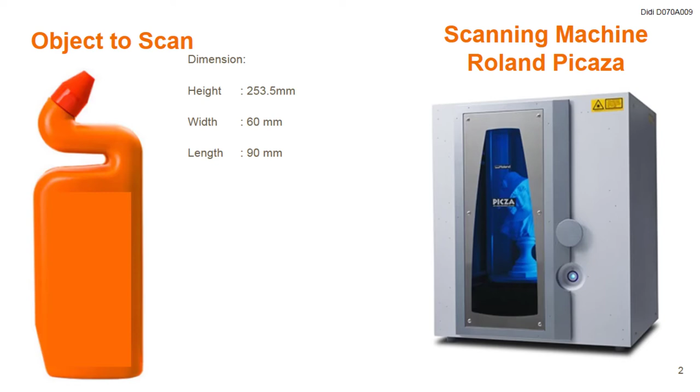The dimension of the part is like here in the picture. The scanning process I divided into two steps, the bottom part and then the upper part, because I want to get two kinds of scanning, rough and fine. So let's jump to the scanning process.

So first of all, we should put the part over here and then close the door, and we just turn it on. Okay, and at the software part, click the preview, I guess.

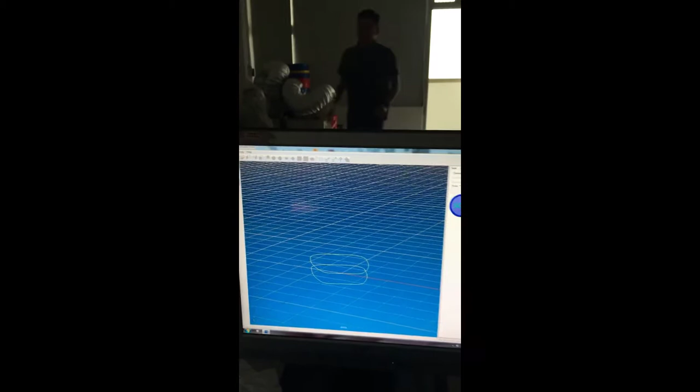You have an umbrella? No.

They are doing the preview. Inside there, there's a laser sensor, and right now it's doing the slice by slice previewing.

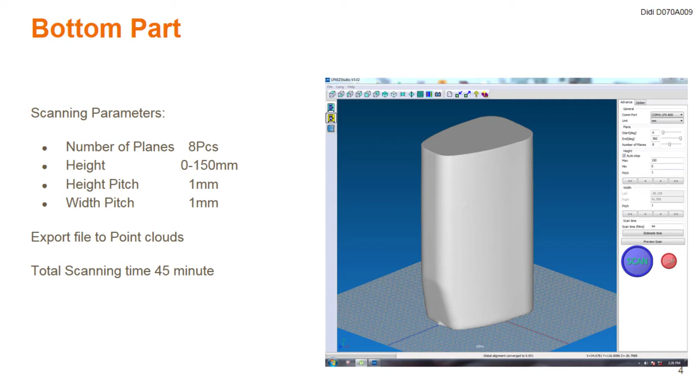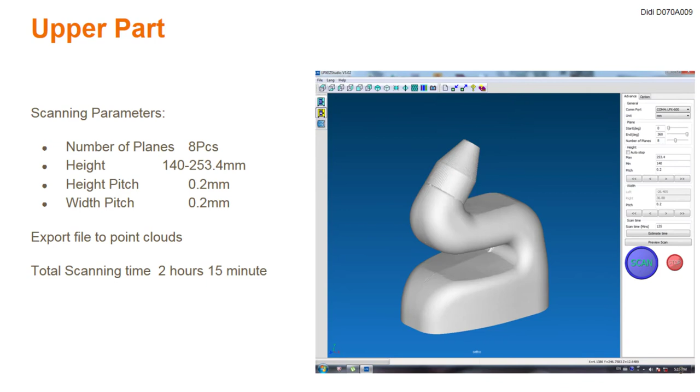Okay, let's see what's the result. So this is the result of the scan from the bottom part. The total scanning is about 45 minutes just for this bottom, and then this is for the upper part with a smaller pitch, and it took 2 hours and 15 minutes for the total scanning.

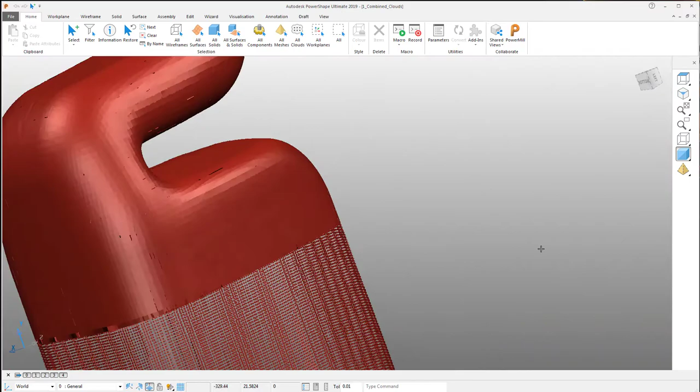So this is the point cloud which is imported into PowerShape. As you can see, there are two different resolutions of the scan data. The lower is the coarse resolution, and the upper is the fine. And then I just click both of the point clouds and combine.

Okay, after combining the point cloud data, I just click and create a mesh from it. I'm using the step over, I think maybe 0.5 is enough, and the fill hole diameter will be, I think, 5 millimeters. Okay, and then we just click OK, and PowerShape will generate the mesh from those point clouds.

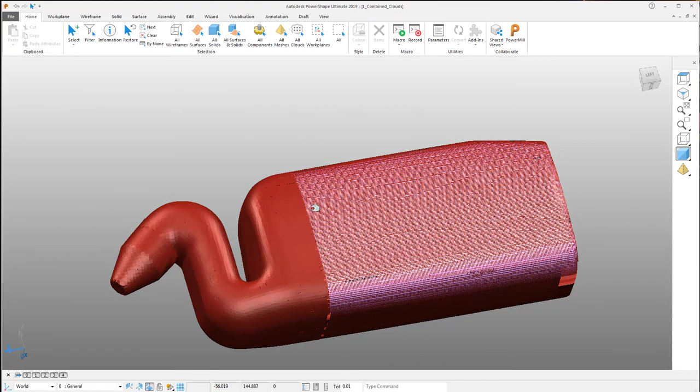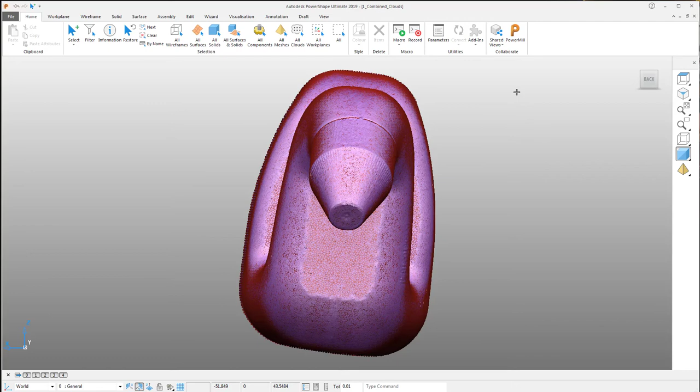Okay, it's done, and as we can see here, I will show you. That's the purple color. As you can see, there's the point cloud merged with the mesh data. I think it's quite a good result, but the orientation is not as we desired.

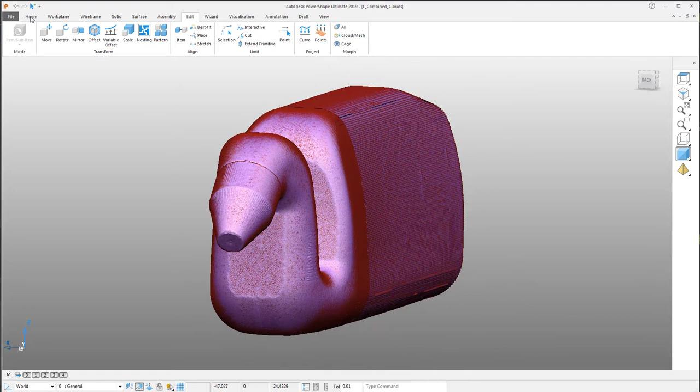So I will reorient using the rotate command, using maybe 6.5 degrees. Okay, just click OK. Yeah, I think it's aligned enough. It's good enough for the alignment. Okay, now I will select the point cloud and put it in the layers, so we can continue working, and then select the point cloud to the selection.

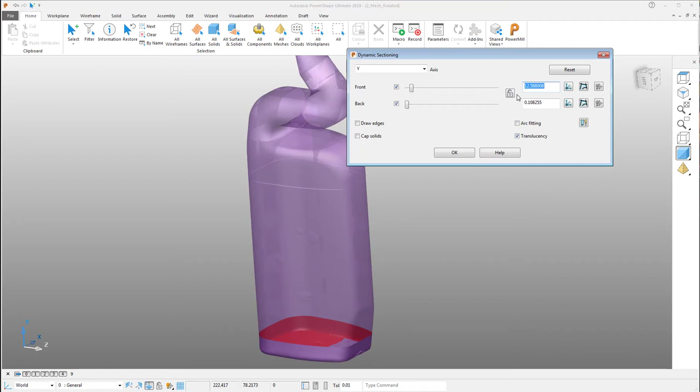Okay, this is the view of the mesh. And then we are going to start building the wireframe like a skeleton, basically using the dynamic sectioning. As you can see, if I slide the slider over there, I can see through using the sectioning, and at a particular section I just click create a wireframe. So basically PowerShape will create the wireframe around the axis, around the mesh.

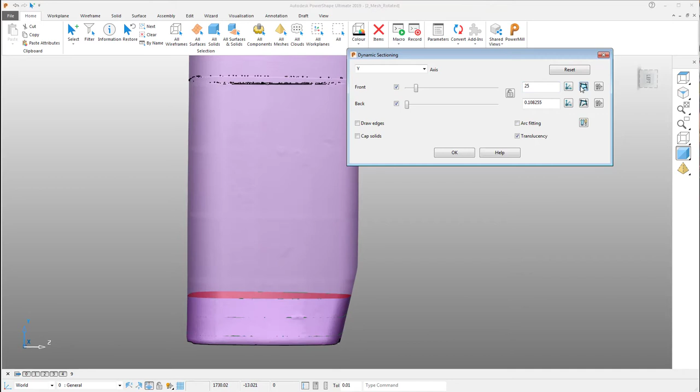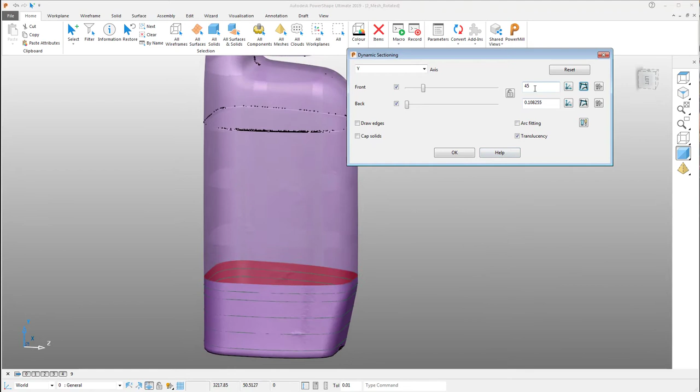Okay, so I just continue creating the wireframe over there. Because there's a slight taper angle, I need a few wireframes, and when it comes to the top, I assume it's not necessary to put wireframes in between, because the shape is similar, maybe like an extrusion. So I just create the last wireframe over there. So just jump into the last section of the wireframe.

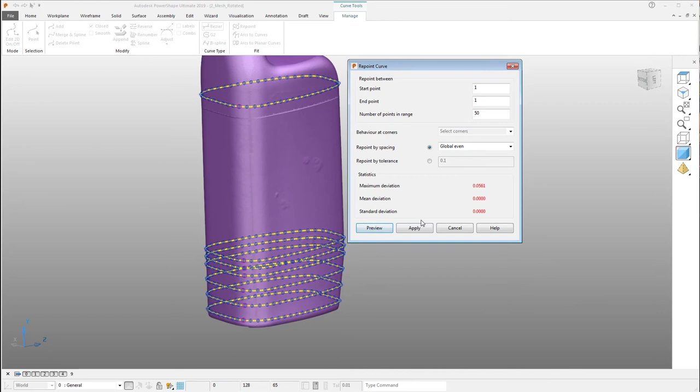Okay, so I select all the created wireframe here, all of it, and then I do the repoint to rearrange. Okay, so after I arrange, I just click all the wireframe and then use the smart surfacer, and I will choose the appropriate command. Okay, so that will be the body.

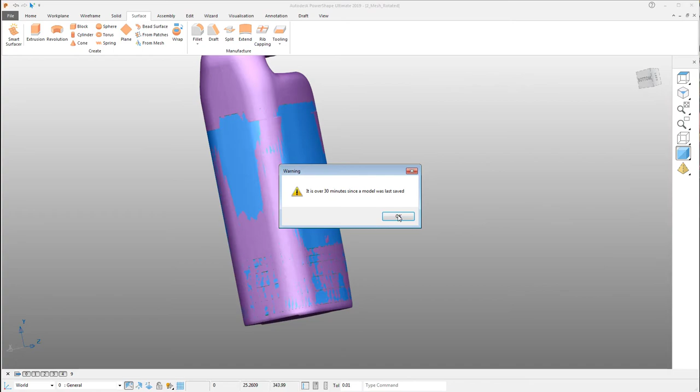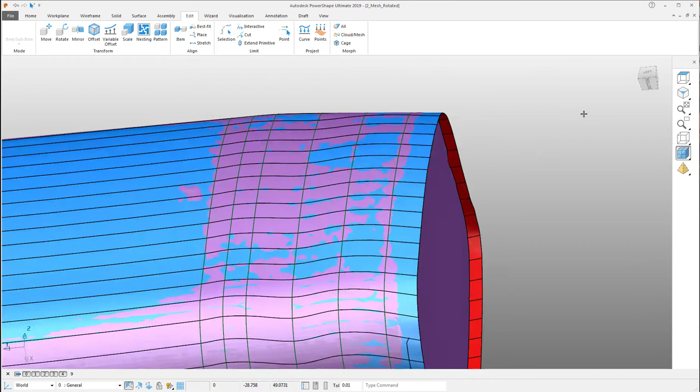Okay, that's the body. So for the bottom part, I need to create the extension of this surface using the point over there. So I just click and drag to the particular location, and then in that particular position I use manual segment to select the plane, and then we just select the plane over there, and then let's preview. Okay, it will create basically an approximation to the surface over there. So then I just hide

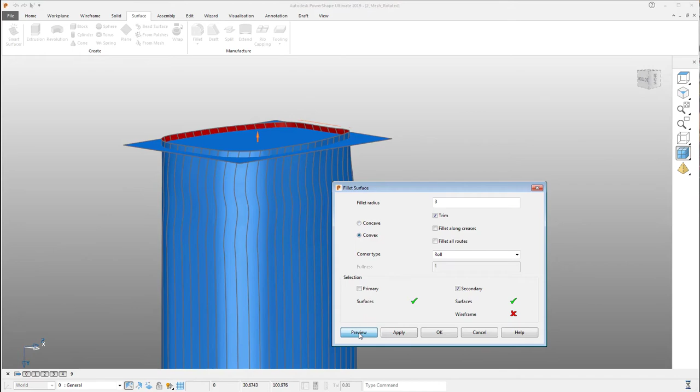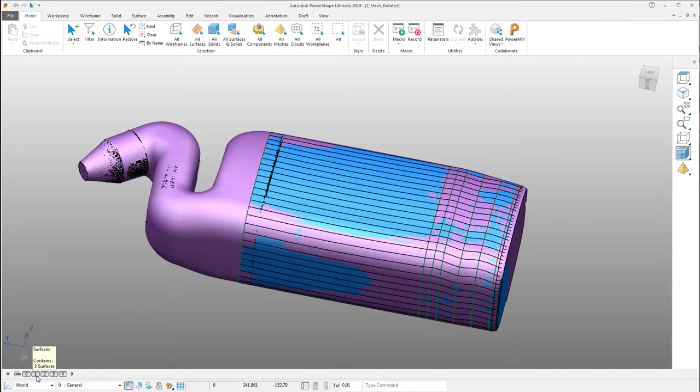the mesh, and then I will create the fillet in between those two surfaces, with a 3mm radius. Okay, yeah, I think that's a good sign. Okay, perfect. So let's continue to the rest. Maybe I will put the surface at layer 1, and then wireframe to layer 2.

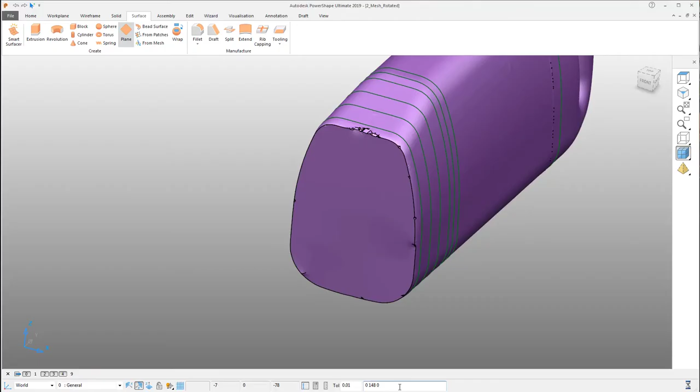Okay, so I need to create, I will divide the position over there. Okay, so I create a plane surface with 148 to create a plane over there. So that plane we're going to use later on to split the mesh, because the bottom surface is already created. So that particular location I need to use

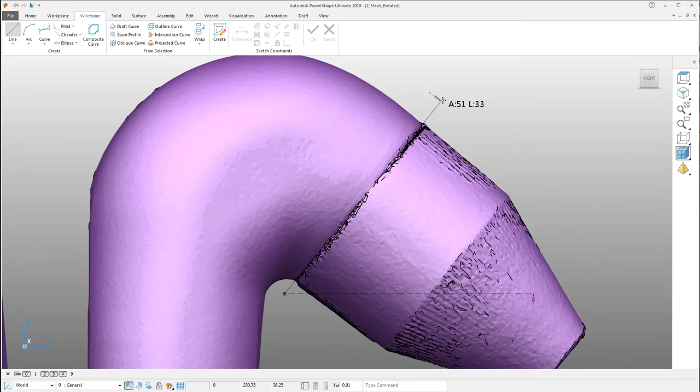as a cutting position. Okay, so I create a sketch here at around the neck position of the cap. I also want to use that line using a 51 degree angle, and then that particular position I will use to cut the mesh. Okay, so first of all I will create the surface extrusion on the line and then use the equal length.

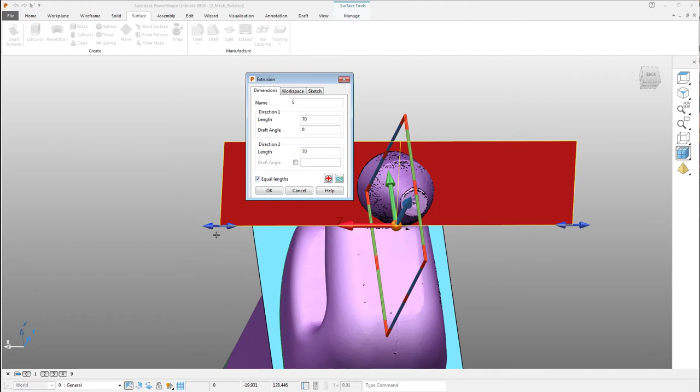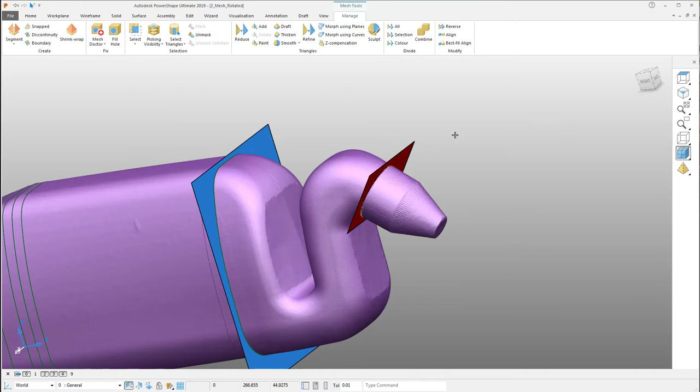So this surface is going to be like a knife to cut the mesh over there. Okay, it's already cut. So as you can see, I have divided the mesh over there. So from the particular mesh here, I create a new work plane. Okay, no, first of all I will create the boundary. As you can see, it will create a curve around that edge of the boundary.

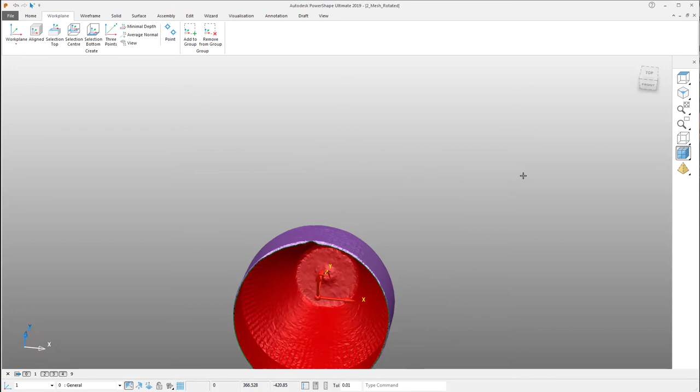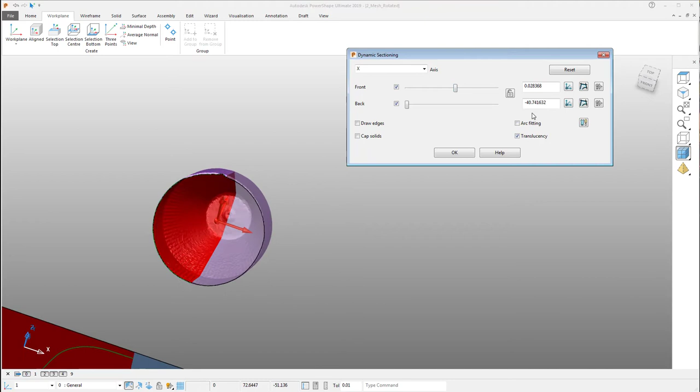And I also continue to create the work plane using the center selection here. It will automatically put the work plane in the center of this particular mesh, and then from that position I use the dynamic sectioning to capture the skeleton. As you can see here, if I slide, maybe I will use 0. And then from that position I capture the curve. Let me hide, yeah, over there.

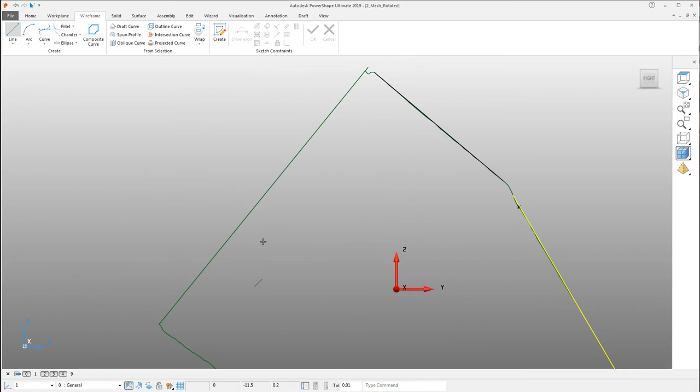So the principle is I will use this, we call it like a revolve sketch. So in order to have a smooth surface, I recreate the sketch over here using the line, as you can see. Okay, like that. And then I will continue to recreate this line. And then I will add a fillet over to this line over here.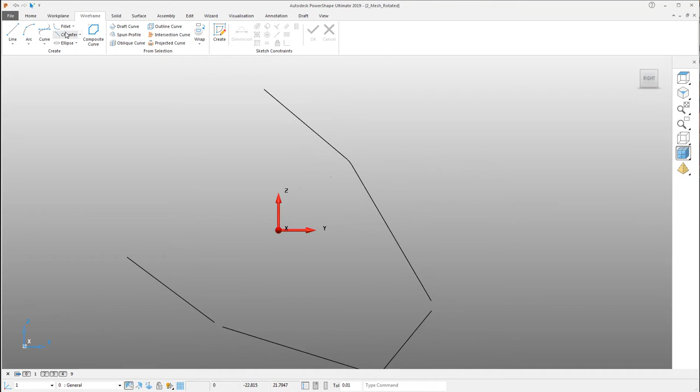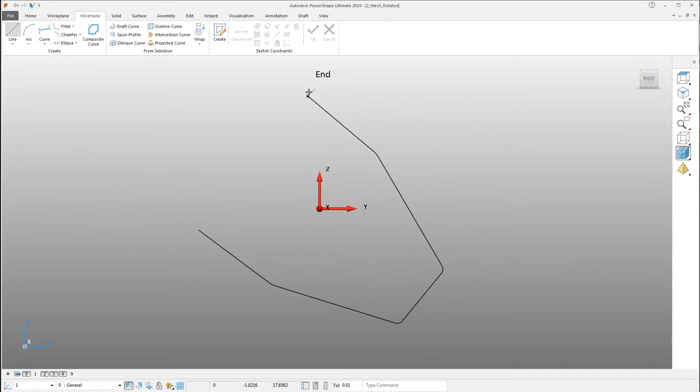I'll add a fillet there, and then I can drag the value of the fillet. Maybe 3 is enough. So I'll continue and also create a fillet over here, and then over there. Maybe it's too large, so we use a smaller value of the fillet. Okay. I will connect both ends and then use the midpoint.

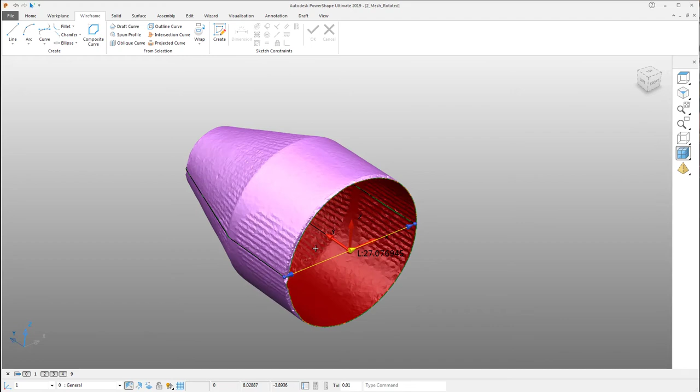And right now I'm going to reposition my work plane here, and then I will align the axis in order to match. To align, you just click and drag the arrow over there. Okay, I think it's perfectly aligned. So as you can see here, in PowerShape you can simply create a curve which will follow the particular edge of the surface, solid or line using the composite curve.

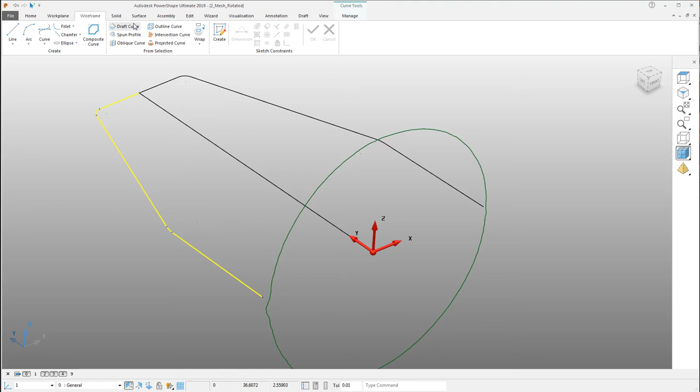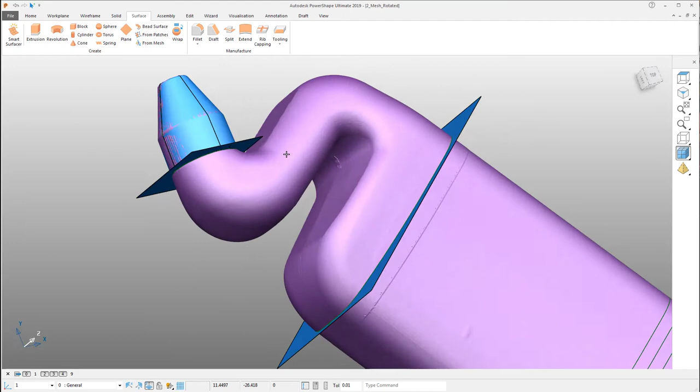So you just define the start and end, and then click, it will create the surface, and then I just revolve it like that. Okay, so it's created, the cap of the bottle. Now let's continue to what I call the duck neck, because it's like the neck of a duck.

So first of all, I will create the z-axis cutting over there. Okay, I will create the curve. And then I also need to add some radius over there.

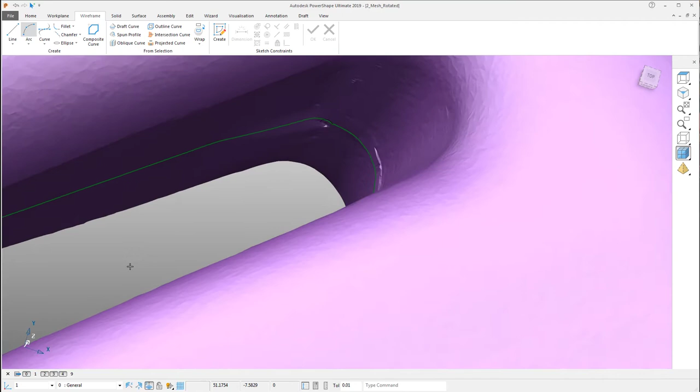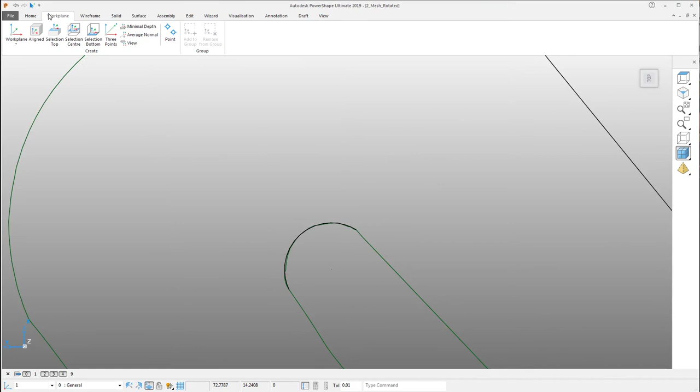Okay, let me adjust the position in order to get a better view. Let me hide the mesh first. Okay, over there, and then this one. Okay, then I'll put a work plane over there. So later on we're going to use that work plane as a useful reference.

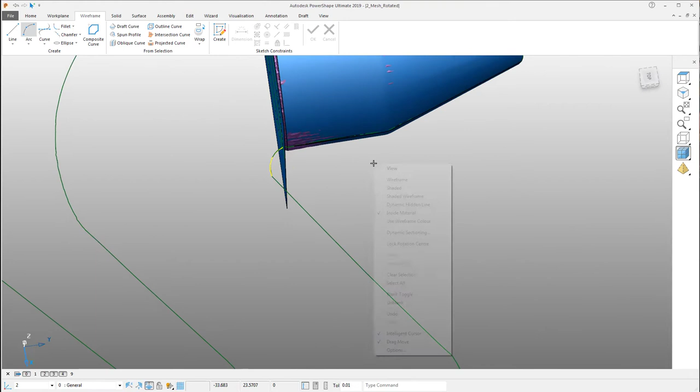Okay, so I continue to another arc over there. Okay, and then put the work plane at its center. Okay, so I align this work plane. What I'm trying to do is align this work plane in order to get the vertical and horizontal position of the bottle, like that. Okay, and then this one also.

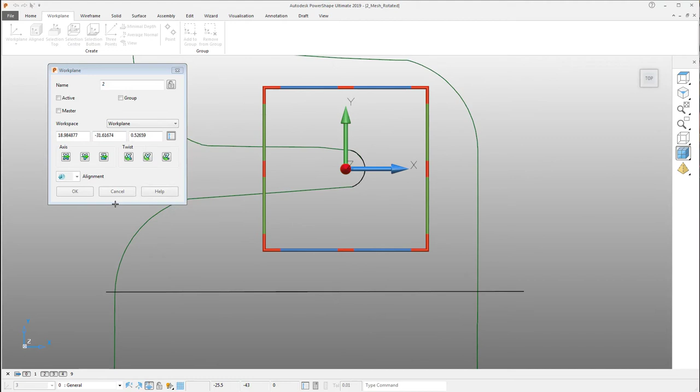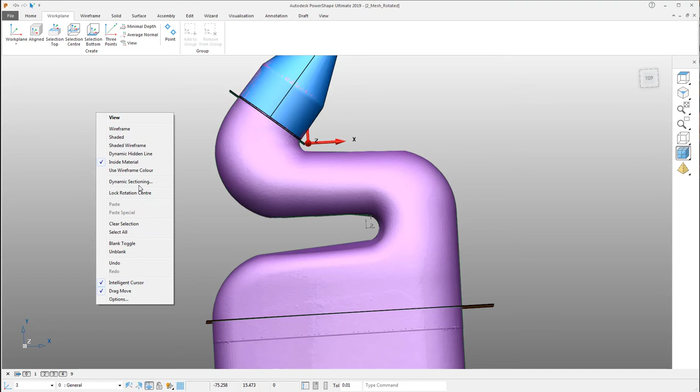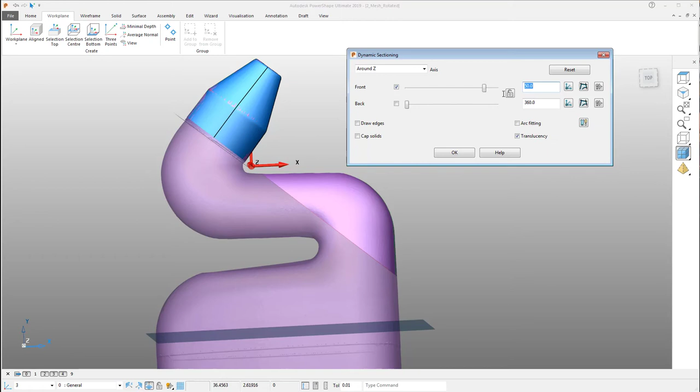Okay, so from this particular work plane, I start to create the sectioning again. Right click, use the dynamic sectioning, and then choose around z-axis, so it will be pivoting around the z-axis, and then you just define the angle of the slicing.

I think it's enough. Okay, so I will create the slicing every 10 degrees, as you can see here, every 10 degrees. Later on I'm going to use those curves from the slice geometry to create a surface. Okay, like that.

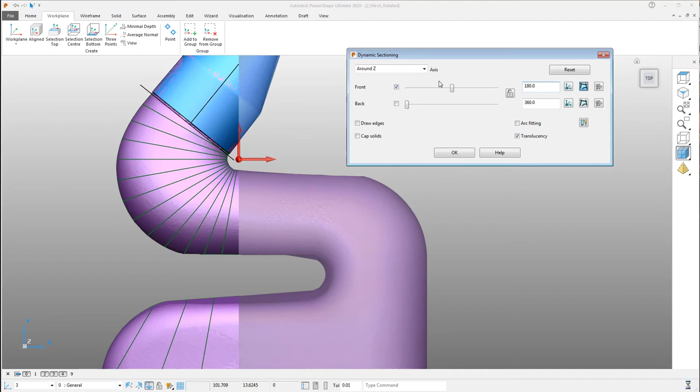I still edit another one until 180, and then choose the x-axis to slice. Okay, I will use 10 millimeters. So I will create one more curve over there, and then if I continue, maybe I will have to switch to another work plane, which I already created over there.

So I choose that work plane, and again use dynamic sectioning around Z, so we can continue this process to the other turn of the neck of the bottle. Okay, so this one also uses a 10 degree interval, until

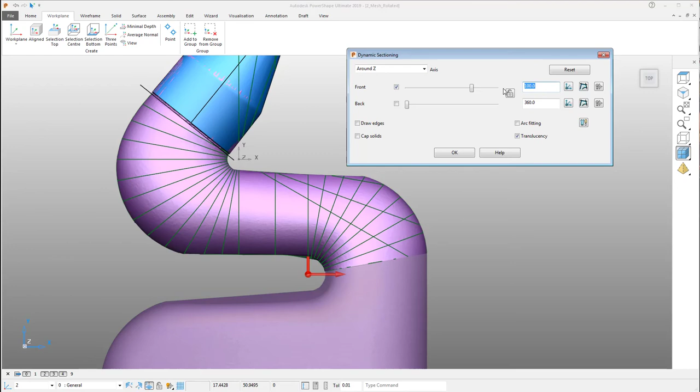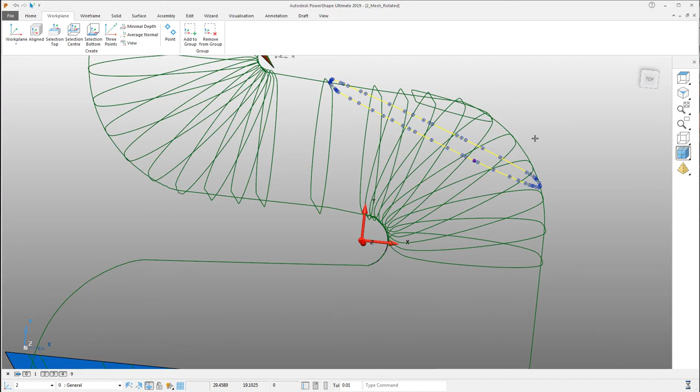90 degrees. Okay, so as you can see here, there are a lot of curves, which is quite confusing, so I will try to delete the unnecessary curves. So let me select the unnecessary curves. Okay, I think over there there's still some. Let me hide the surface and the mesh. Delete. Oh, this one is not. Okay. Delete.

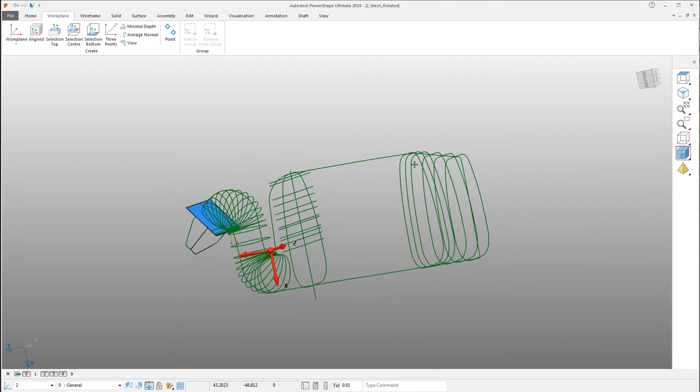Okay, delete the curve. So basically just deleting all the unnecessary curves. Okay, this one as well. Okay, so let me hide. This one still has a line or curve projected from the section. Okay, let me see if there are any more curves. Okay, that's it. I hide it. The surface I hide it.

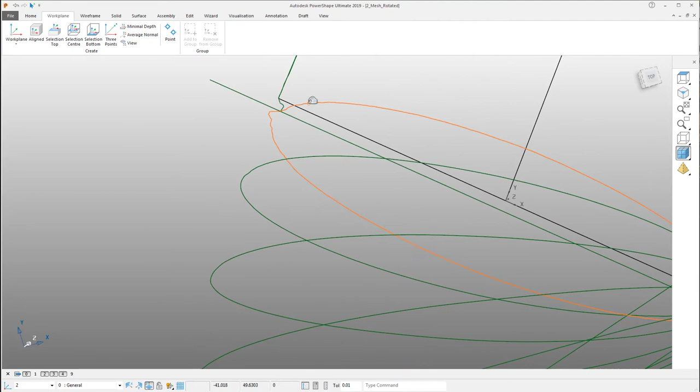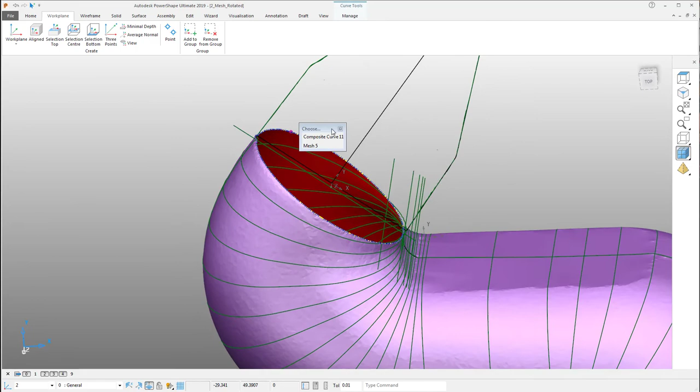Oh, I think, yeah, that's the cap. There's a little gap between the cap and the neck. Okay, I actually have a gap. So let me hide those meshes, and let me see. Okay, so here as you can see, there is still an unnecessary curve. Okay, I think it's quite a clean, good section.

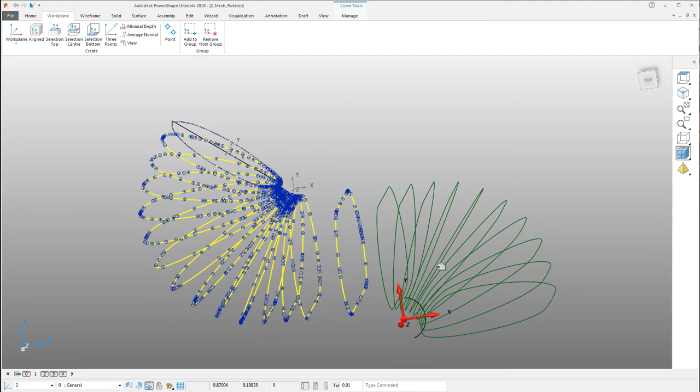And then to start off creating the surface, we need to select all of those curves, and then we need to do the repoint in order to get a uniform point distribution. So maybe I will use 50, sorry. Okay, I think it's good. Okay, apply.

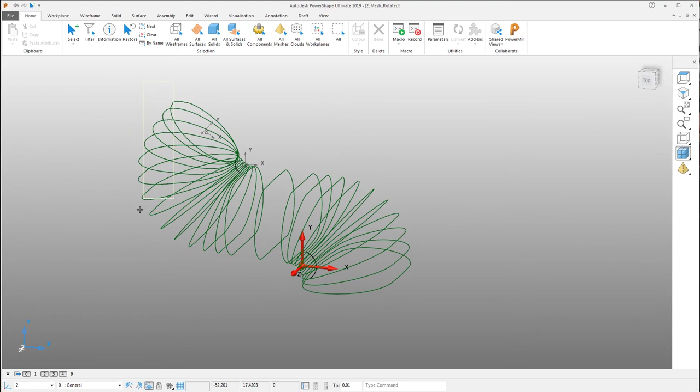Okay, so right now I'm going to continue to select all the curves, and then with these curves I just click the surface creation and choose the appropriate option. Okay, from separate. Okay, now we are done with the neck surface and bottom, and the last one is the mid surface over there. We still have to create it.

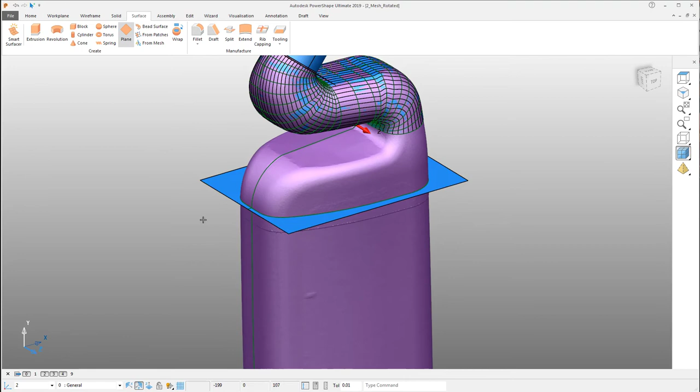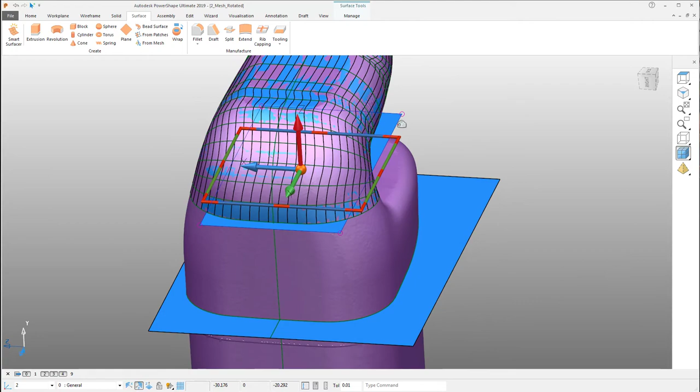Okay, so I need to create the plane in order to cut it. So I put the surface plane at the 0,0,0 location, and then let me enlarge this. Just simply click and drag to enlarge it. Okay, like that. So I'm going to split this mesh using the limit selection.

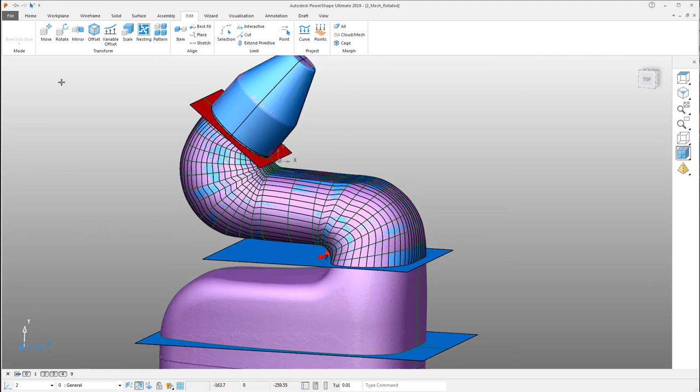Split the mesh here. Okay, and then also the bottom mesh. Okay, let me add the selection. Okay, so this one is the cap, this one is the neck, and this one is mid. I call it mid.

Middle transition between the neck over there. I think this one is quite a challenging shape in this particular position. So let me cut it. So I just cut and then left it like that.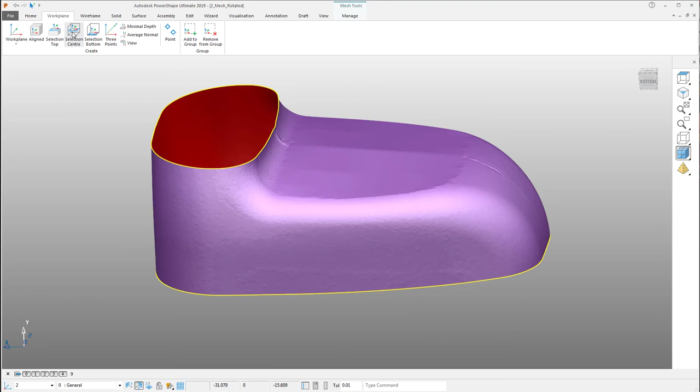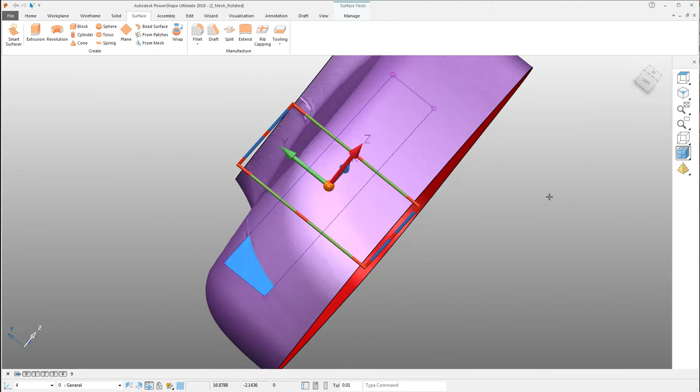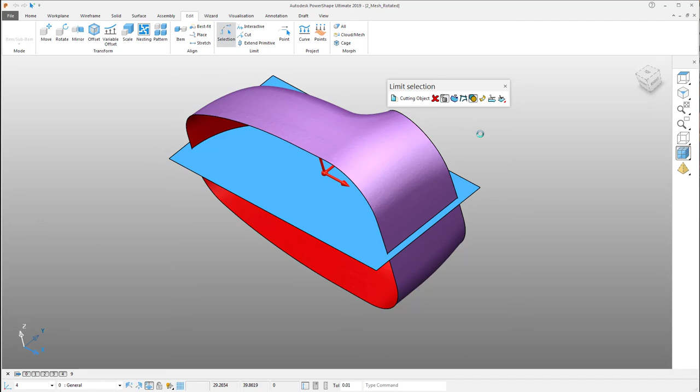Create the work plane again at the center. Okay, and then from that work plane I create a plane at the 0,0,0 location. Then I enlarge this particular surface. So my plan is to cut this surface, this mesh, using the surface. I divide it into two in order to simplify the surface creation. Okay, just cut, split those two meshes, and then I will hide.

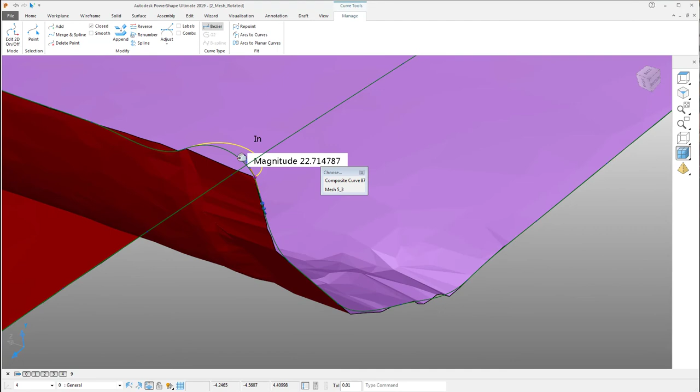And then from this mesh, I just use the boundary edge. They will automatically create the curve within the edge, and then repoint the curve, maybe using 200 points, so they will have a nice distribution of the points. So when you look up close at the position at the corner here, it's not exactly the corner, so we have to edit. Okay, let me click drag. I'm using the editing tool of PowerShape here.

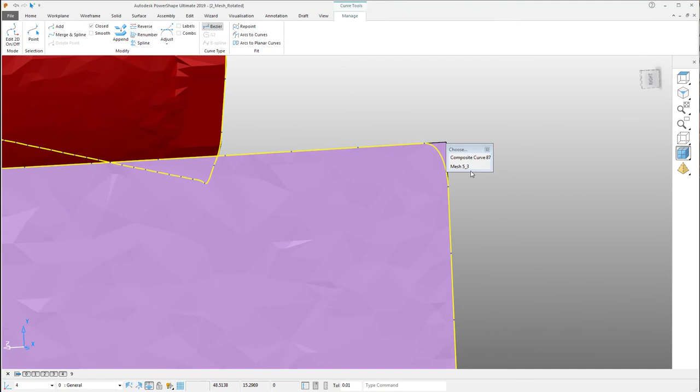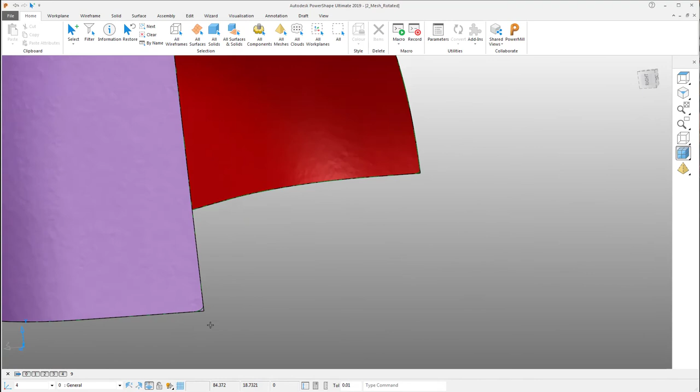Okay, so basically I just correct the orientation of the curve, in order to have the perfect match of the corner over there, here as well. I just click the point and drag it into the corner. Click and drag it, and then we arrange the direction. Okay, over there. So we still have two more to go. Click and then also arrange the direction. You need to click and drag at the arrow, not at the radius over there.

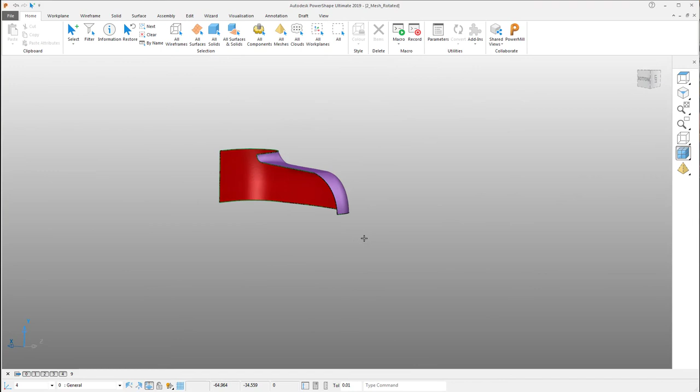Click, click and drag, and then align it to the particular edges. Okay, I think it's a good perfect match between the curve and the mesh. Then select all the mesh and then the curve. Just create the surface using Smart Surfacer, and then in the advanced option, using the smaller tolerance, you will get the perfect match between the curve and the mesh over there.

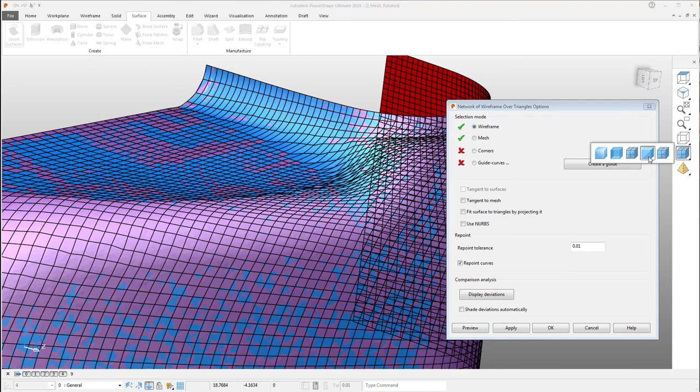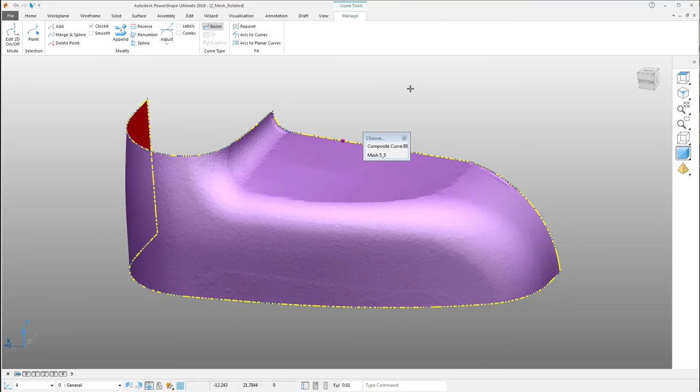Okay, just click apply. So you can see we have quite a good surface, and it's matched with the mesh, and then we have to do the other side of the surface. Actually, you also can mirror the surface, but here I don't really like using the mirror on scan data, because I'm not really sure whether this particular bottle is fully symmetric or not. But if this bottle is intended to be fully symmetric, you can just mirror the result to the other side of the surface, and then there's no need to create this surface twice like me.

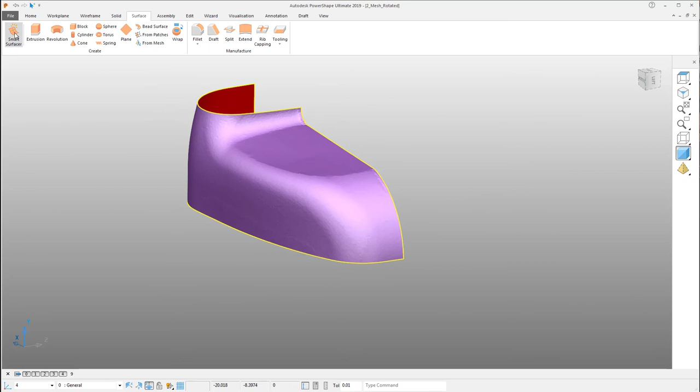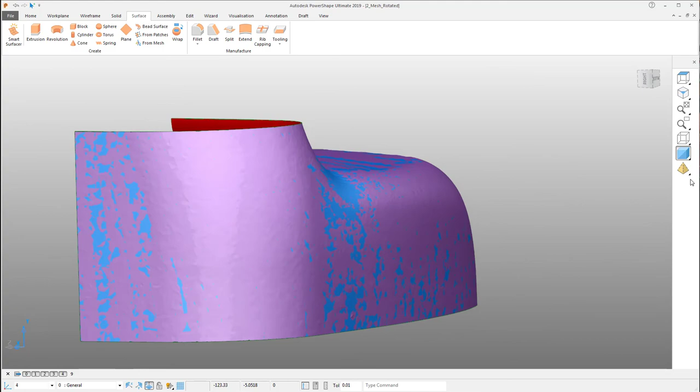Okay, so this one is actually already a good match, and then you just select, click surface, Smart Surfacer, and then click advanced, using the lower tolerance in order to get a good perfect match to the surface. Okay, I think all the surface is already done, as you can see here. So we just hide all unnecessary surfaces.

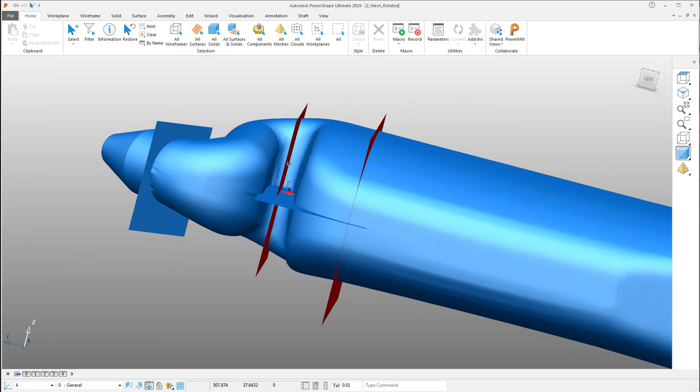Now let me continue to the very last step, which is we have to convert this bottle to solid. Just click and then hide all the patches over there. As you can see, between the cap and the neck of the bottle we slightly have a gap. It's okay, because actually the cap of this bottle can be removed. So I'm going to use two solids.

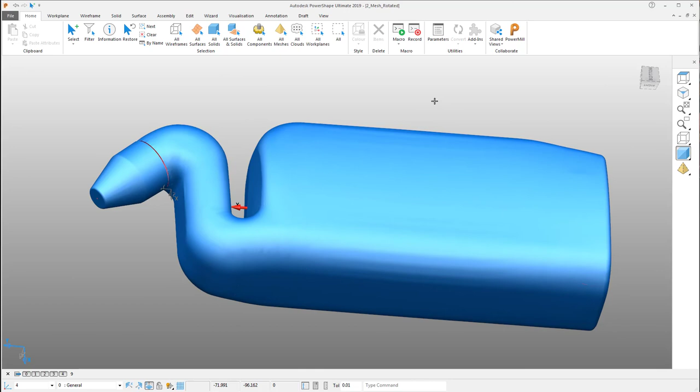So just click all the surfaces, and then go to Solid, and there is Create Solid from Surface. Okay, so now it's already converted into a solid. And then you just rename them: body and cap. Okay, that's it, it's finished.